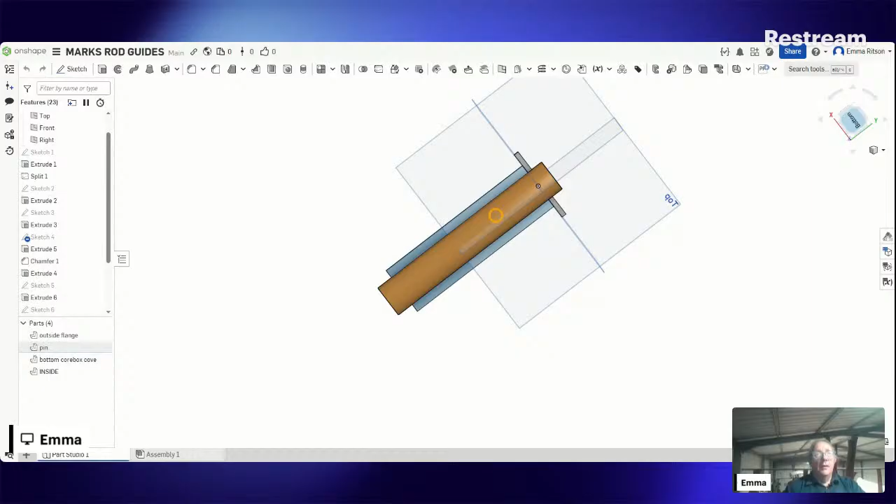Been messing with this week. There's always jobs to do.

Now these are steam engine parts, or not really steam engine parts, but they will be steam engine parts. This is what it does. Right, I'm going to take this out. I might take that one out. But we've got two steam engine guides here that need to be remanufactured because they're worn out. This is a rod guide for a slide valve on a Fowler steamroller.

It's in two pieces, this way and this way, so that you can take them out without removing the rod and the valve and half the running gear to replace a worn piece. So they can be replaced very quickly when the engine's running, and there's a bolt in each one. So you just slide down the rod and you do the bolt up.

However, these are quite worn. They are quite worn. And we're going to remanufacture them. So to do that, they need a bit of packing on them, really. See how worn they actually are, you can see that. There's a bit of wear in it, that little lip there. Probably on the full diameter, probably 1.5 millimeters up and down. Not so much side to side.

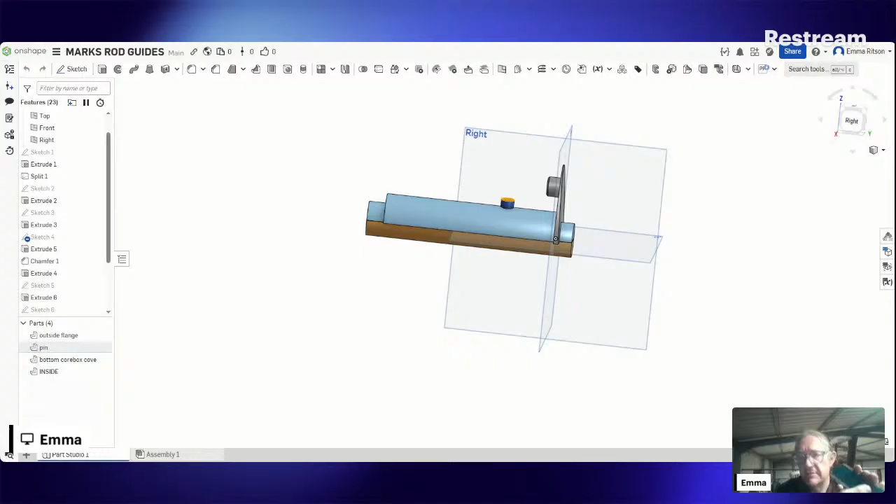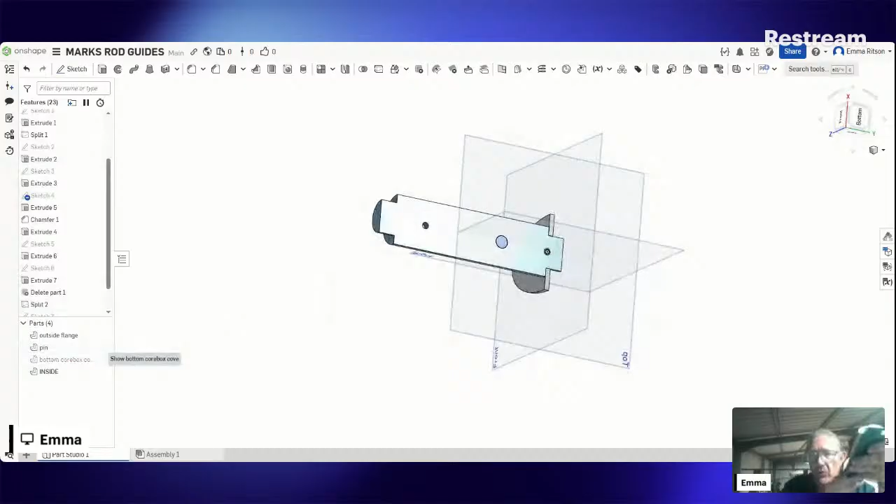If we look at this drawing, we've got 2 pins in the bottom surface to locate a second half of the core, because it's got a round core. And if we put that core box back in place, we'll make a core that diameter. When we mould this in the sand, we can drop that core in, and that'll give a nice hollow casting that should be really, really nice.

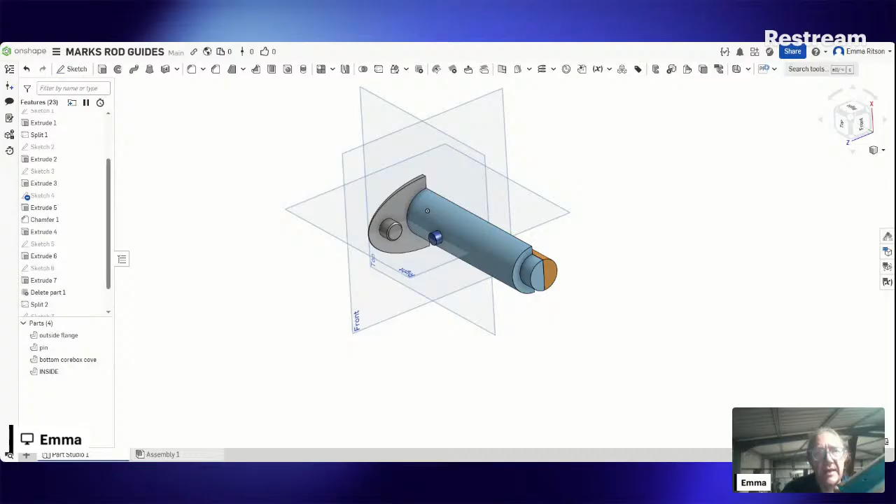So that's the plan there, and that's where we go on with that. That's what I've been messing around with. It will get touched up and a bit of filler and stuff in it, some glue, and that shouldn't be bad, and you should be able to fairly easily break all that out if you want the bits back. So that's one thing I've been working on.

And poke my eye out with a spoon again. It's not even a very good spoon. A cup of tea with the bag still in it, because if I put that out on the table, it'll make a mess. Could probably put in the teaspoon now, put the teaspoon on the table, but I'm not convinced that that's going to fix it.

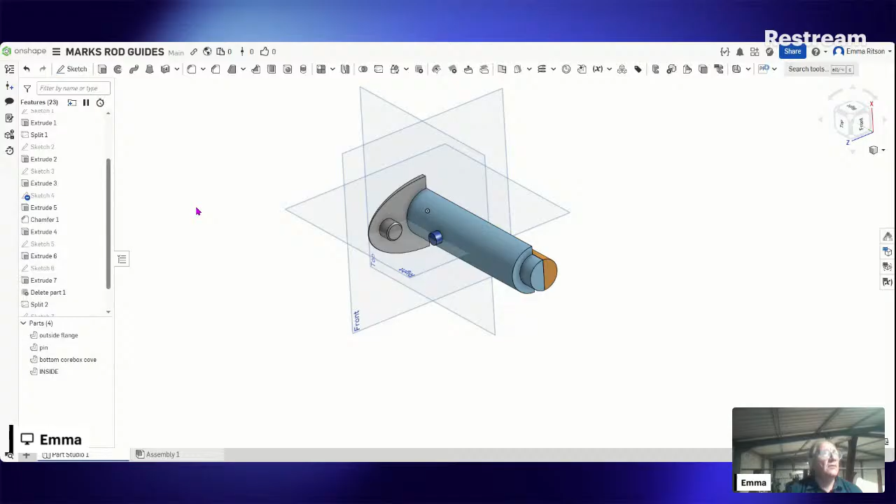So that's sort of what's happening. Oh, I've got, what else we're working on? I've got a picture.

How can I show you the pictures? Probably quite easily. Let's have a look here. I just share them online and then drag them off on my computer. Well, not online, but give us a minute.

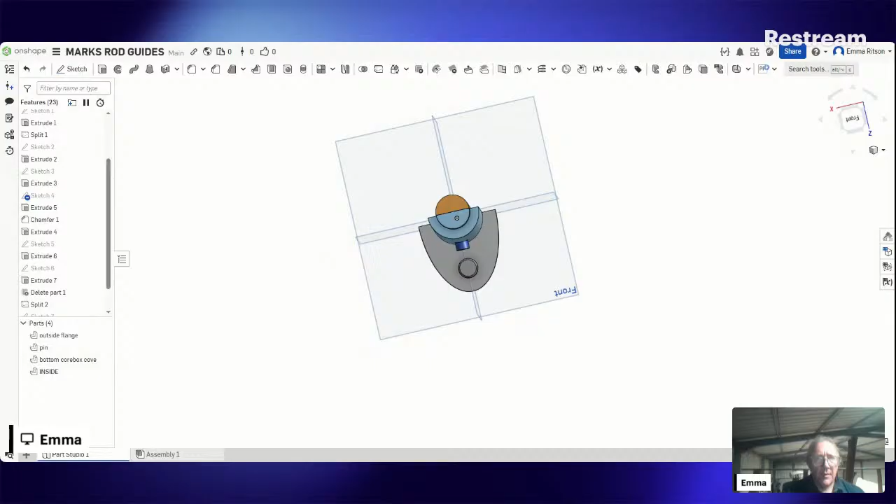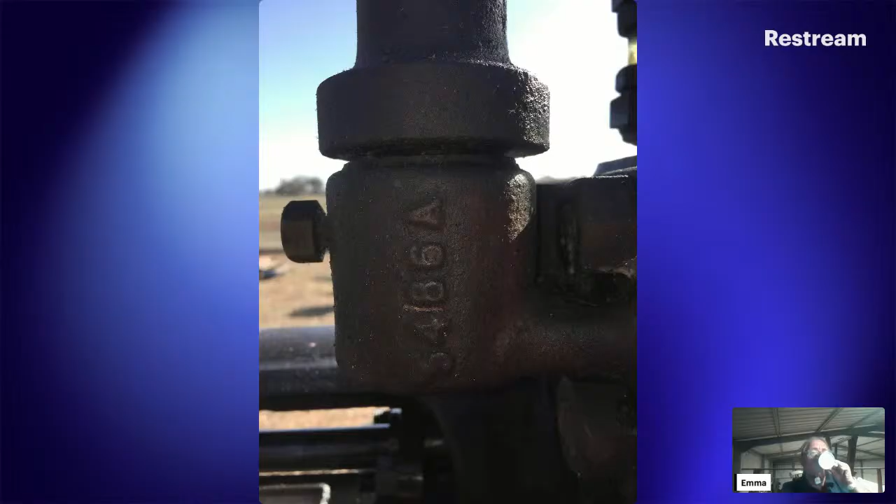Let's have a look. So we've got a picture here of this particular piece with the numbers on it. Now I have been messing around with that too. Have a look.

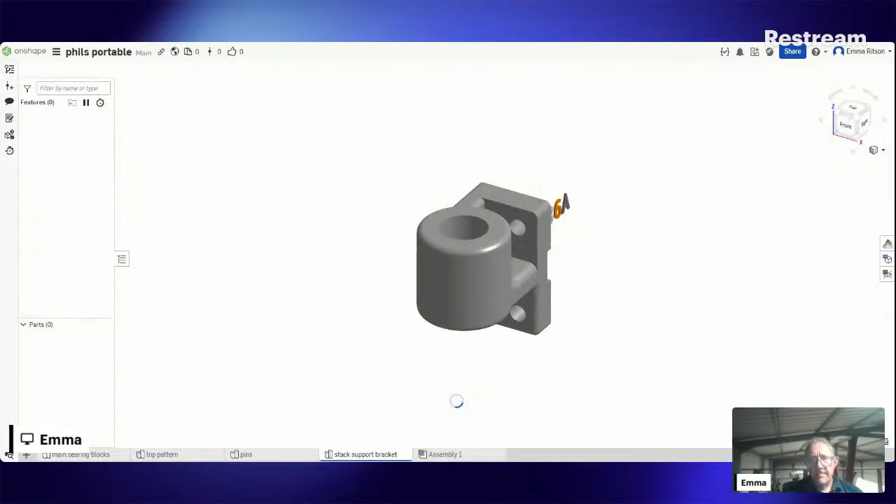Chat's open, but there's no one chatting. Everyone's a bit quiet. So we've got this thing here that I've been messing with.

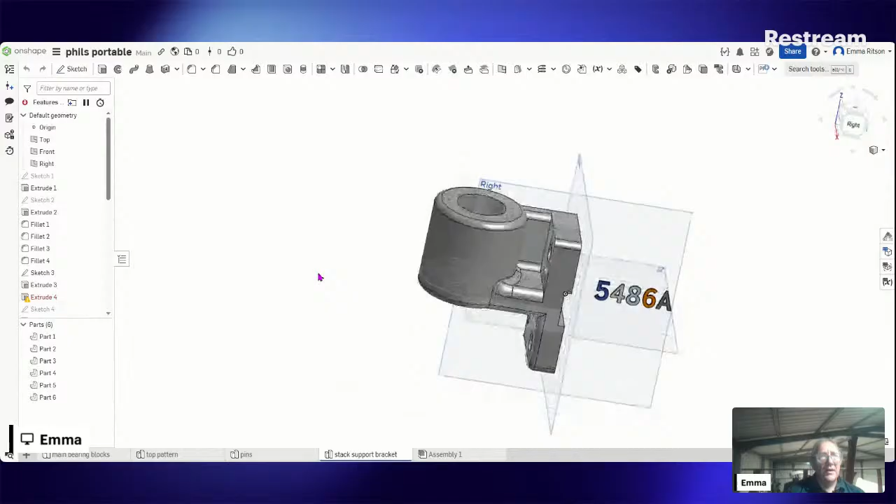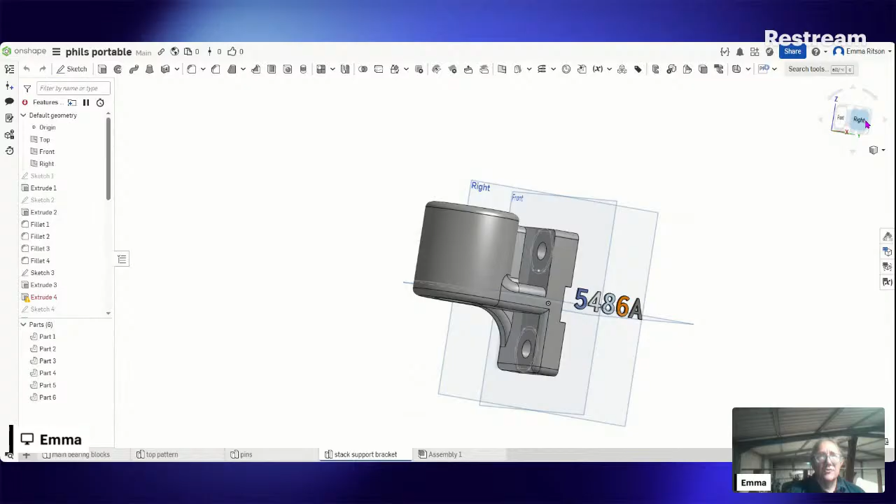Alright, this is as far as we got with it. It's got basically support for the chimney when it's laid down for transport on the smokestack, or whatever you want to call it, when it's laid down for transport on my mate Phil's little portable engine, a 2.5 horsepower Clayton Shuttleworth. It looks something like that, realistically.

If we look at the picture of the casting, it's got S486A written on it. Is that an S or a 5? Let's click this maximize button. That's all that does. Okay, it's probably a 5, 4, 8, 6, A, and those letters I've got there are probably quite good. If we select them...

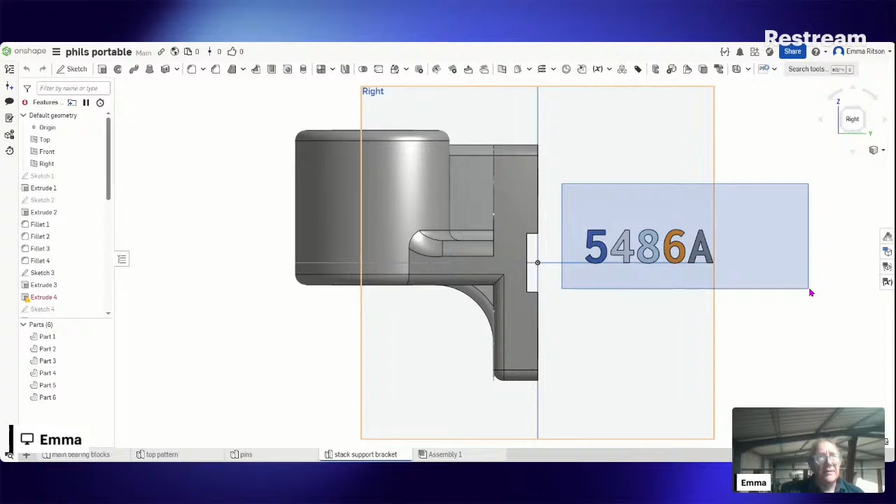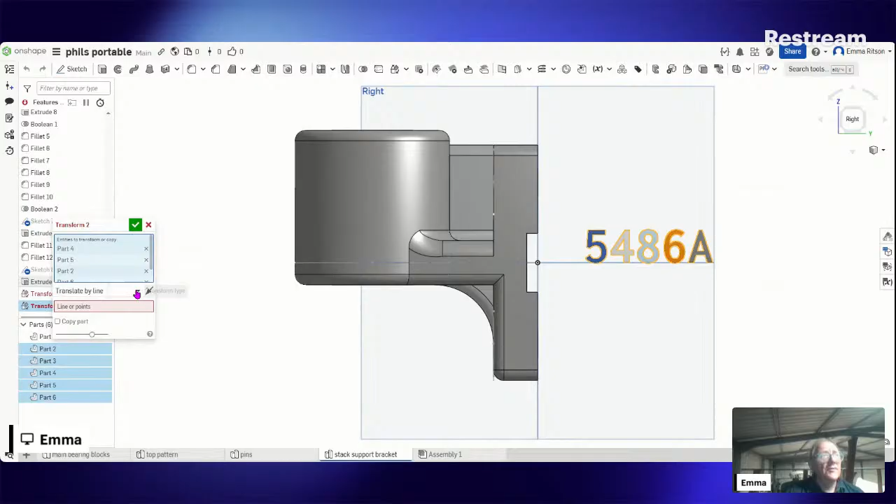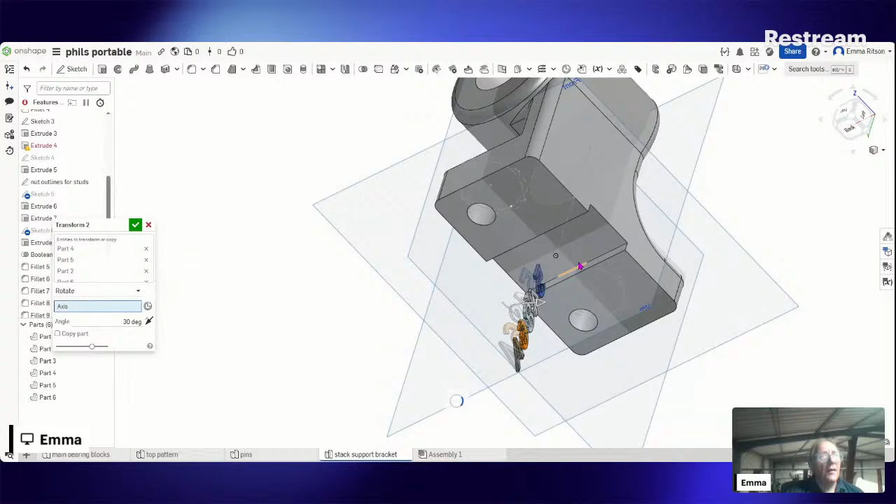Bit of actual CAD here - on the linear pattern, no, on this one, transform. And if we drop down this line here, we've got rotate. It's going to ask us for an axis. Not that one. I think we spun it around on that axis.

Might work. Hey, Mark. Sorry, this was a bit impromptu, we're a bit early and all that stuff.

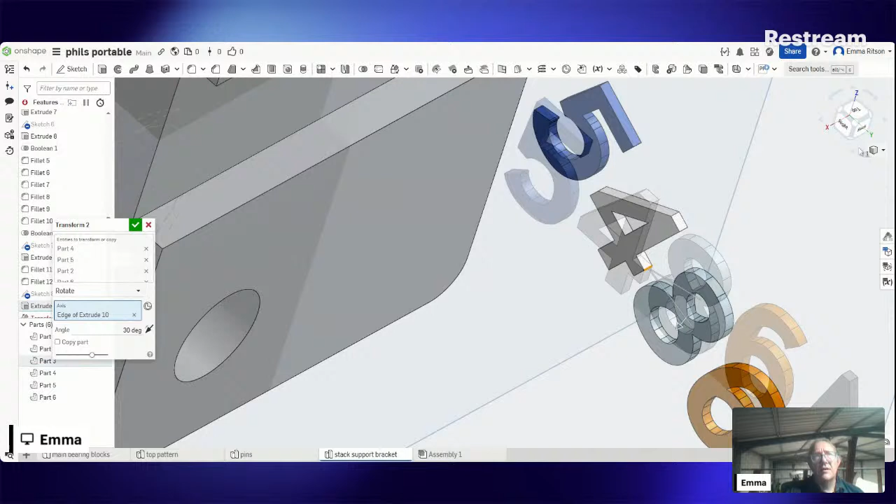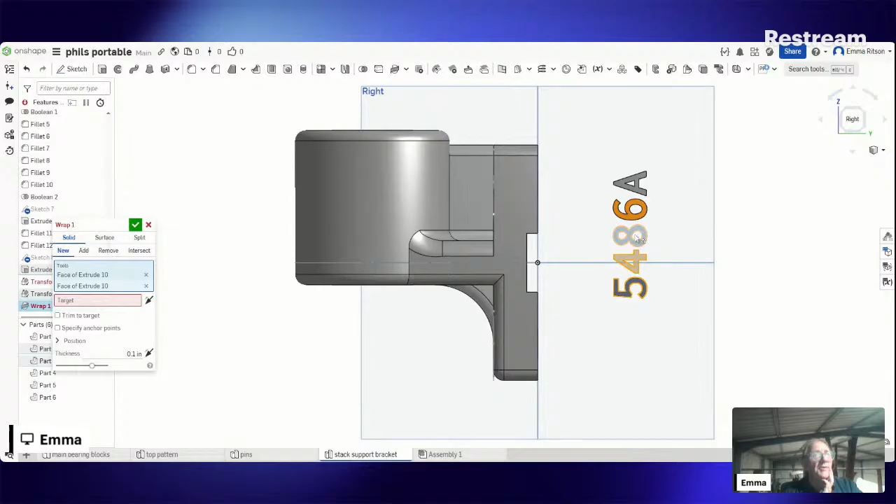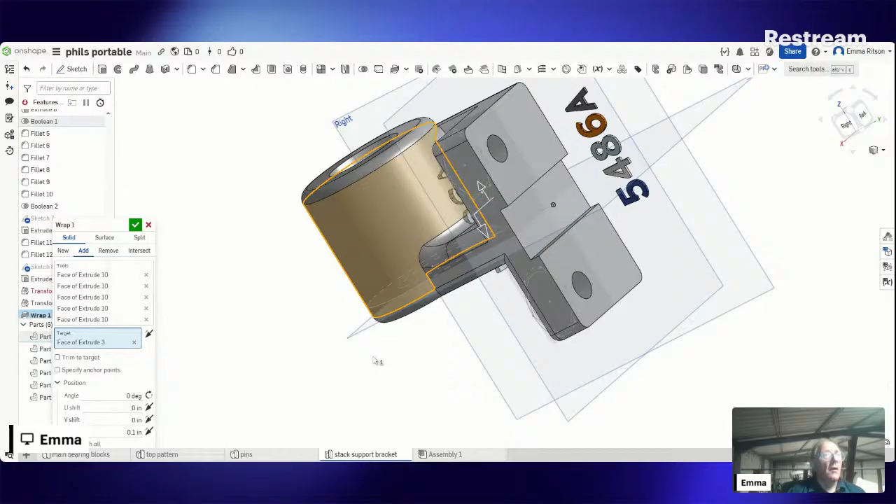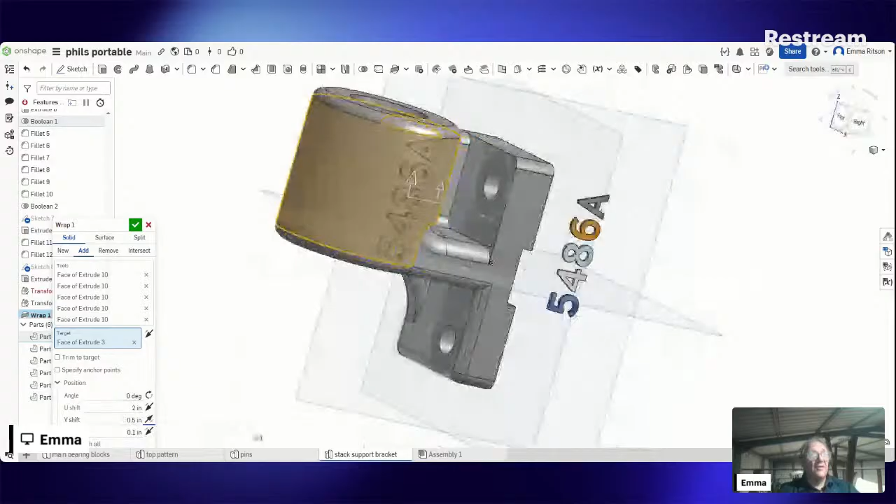Swung about 90 degrees - it's the wrong way up. If we go the opposite direction, that's the right way up. Now we need to put that across on there. I meant to have a look and do a bit of a tutorial for myself on this, but I think I've got it. What it's done is put it around there. So we need to - let's see if this works - 90 degrees. It doesn't. There we go. And let's put that on there fairly nicely. Probably a fraction big.

Going to have a look at this picture again, which is a bit muddy - this mouse. I don't think it's quite that big. Just looking at that, I think it wants to be a little bit smaller than that. But as far as position goes and all that sort of stuff, it's probably pretty good. Now, what we need to do is edit this sketch. That should change everything.

Let's see what that does. It's getting very close. Maybe it sticks out just a little bit too much - that's using the wrap function. That's quite good. Does it stick out too far there? Probably does. Let's edit that. .075, 75 thou stick out. Let's see how that looks. Might cast a little bit better. Anyway, that looks pretty good. Bit of a clean up and some filler, that'll look pretty good.

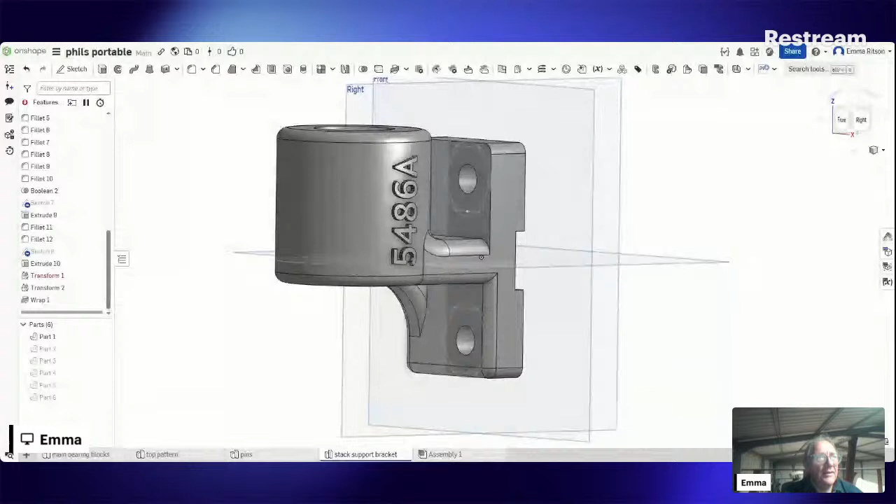I'm going to turn these actual existing parts off. Anyway, that's a good start. A good coat of high build, like surface filler, spray filler on that, and it'll all round up nice and cast really nicely. So you can't see that because I haven't gone back to the screen, which is a bit poor. Let's click this again. Anyway, that's what we ended up with. We made it a bit smaller - we just changed the sketch diameter dimension, and that brought it back down to where it needed to be, and not quite as thick. But that's another job we've done tonight.

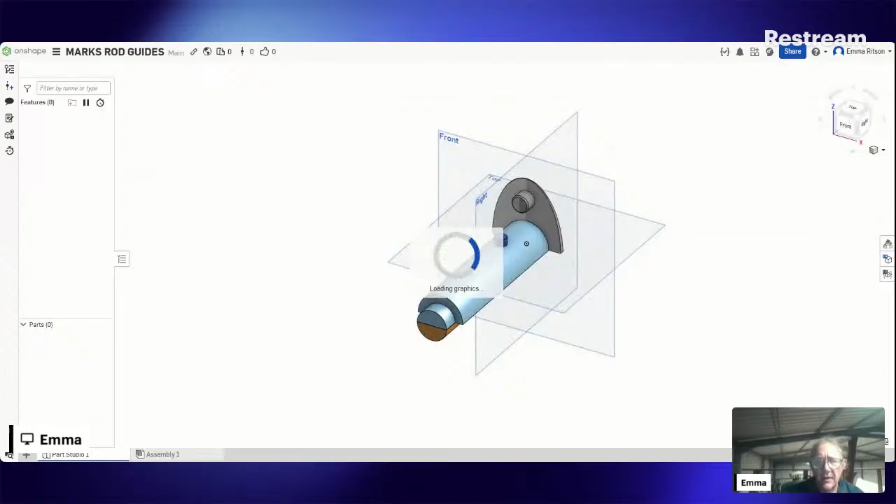Now Mark's here, we might have another look back at what we were looking at before when we started. Looks like it's only Mark here - if Mark's still here, maybe Mark's disappeared.

Sorry TMB, I'm sorry about that, I did get your message too. It's been a crazy full-on week. While I'm thinking of it and while I'm sitting here, I will text you the original for that drawing. I'll have a look at that. Thank you. My life's been a bit crazy this week, but anyway, thanks so much for your patience with that. It's a bit crazy - Mark's disappeared.

Going to show him this. We've already had a look at this, but - oh, he's present, Mark's present.

Anyway, this is the filler piece that I printed for the rod guide.

Awesome, that's great TMB, that's really good. That's what we're about.

This is the filler piece that we printed in the rod guide. It still needs a piece for the core box on the back half there. If we make that in 2 halves, we can mould that down in the sand and tamp around the top, then turn it over and put the other half on and put the cope on. I'll put the drag on and lift the 2 parts apart, take this apart and put a core in it, and we've got a really nice casting. You can imagine it with a core that diameter. So in there, we've got the back piece on, we've got the core in - working on that as we speak.

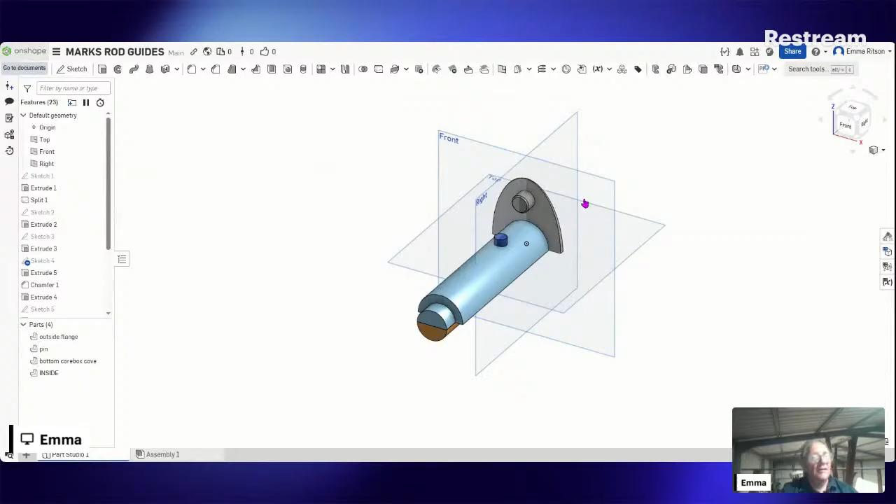Now Phil sent a lot of mud maps, and we might have a bit of a play with them because Phil needs some laser cutting or profile cutting done. And I need, for his portable, some things done as well, I think. I need to spend some time on those. There's always 1,000 jobs.

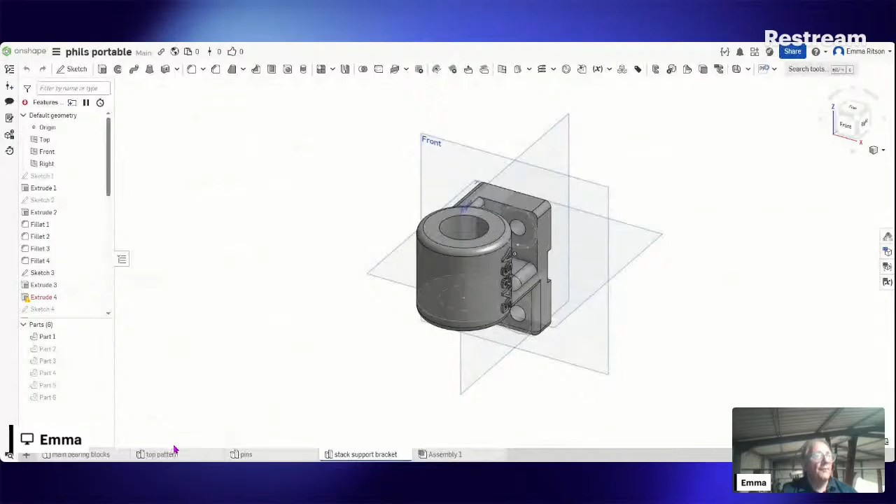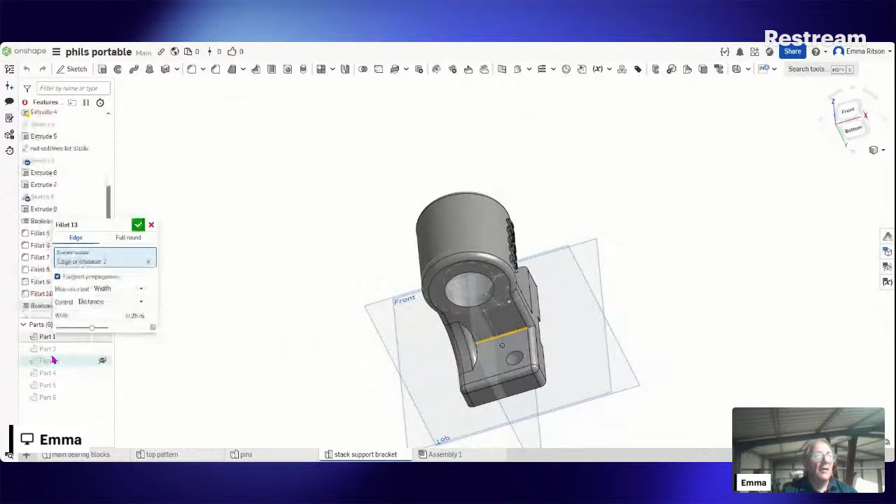Now this isn't anywhere near finished, it needs a little bit of work - clean up stuff like that just to make it sweet. There's no fillet in there, and it won't fillet there because of reasons. We will make it work, but I'll spend some time to sit down with that the minute I've got a chance, really.

He sent some other pictures too, so we'll have a look at them. Excuse the blue screen - it's not what we want.

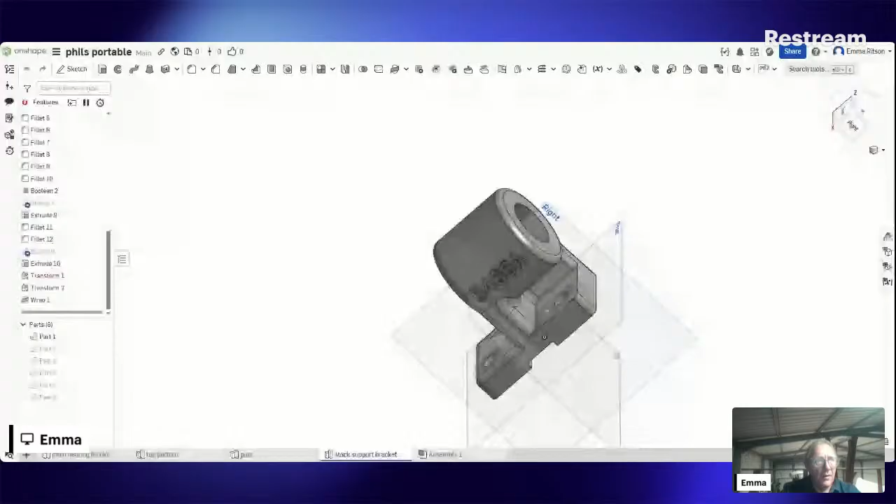That's a fairly straightforward thing to do. Let's do that. So we'll go back to... stupid mouse. Go back to here, and down here on the plus, insert new tab. We'll click that and then create Part Studio.

This is Part Studio 1. We'll rename that so we can find it again next time when we're talking to him. And we'll call that eyebolt for a start. We look at the top.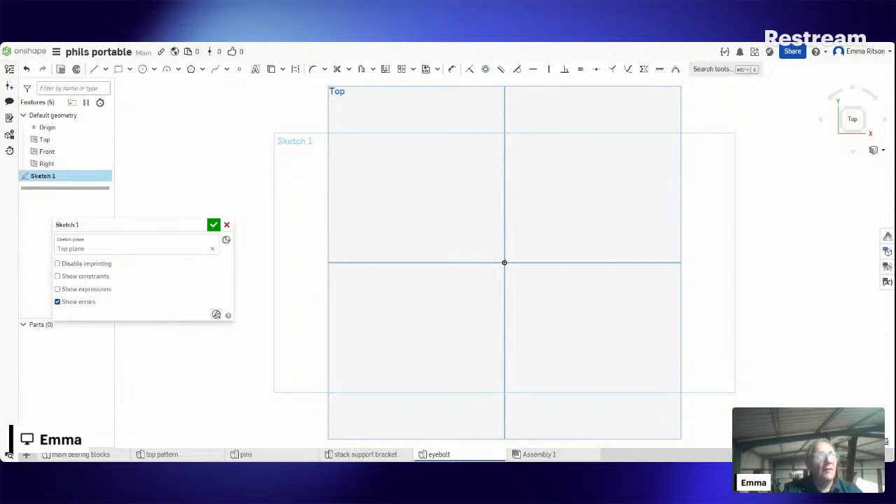Sketch on here. It should be a fairly straightforward part to make. Click sketch. We can click on top, or we can tip on top here. Click on top there. Does the same thing. That says top plane.

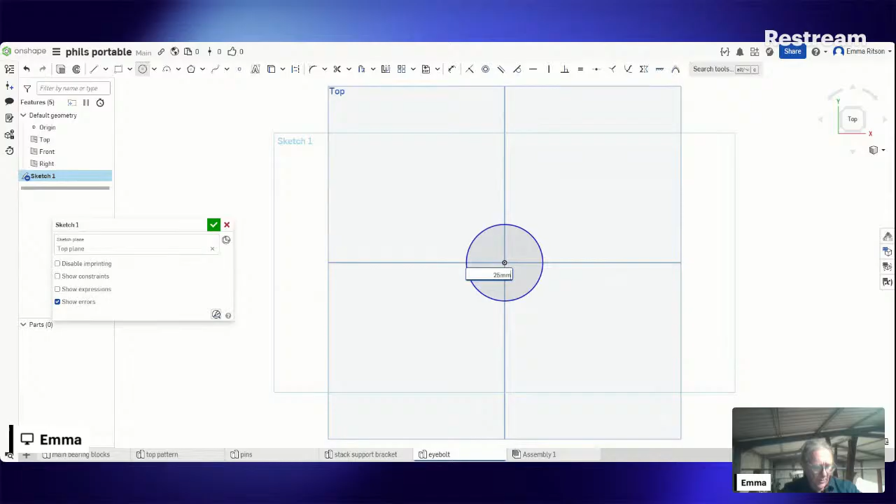Now, first one we know about is this here, and it's in imperial, of course, whereas his is metric. We can just put 25. It does the same thing, 0.984 of an inch.

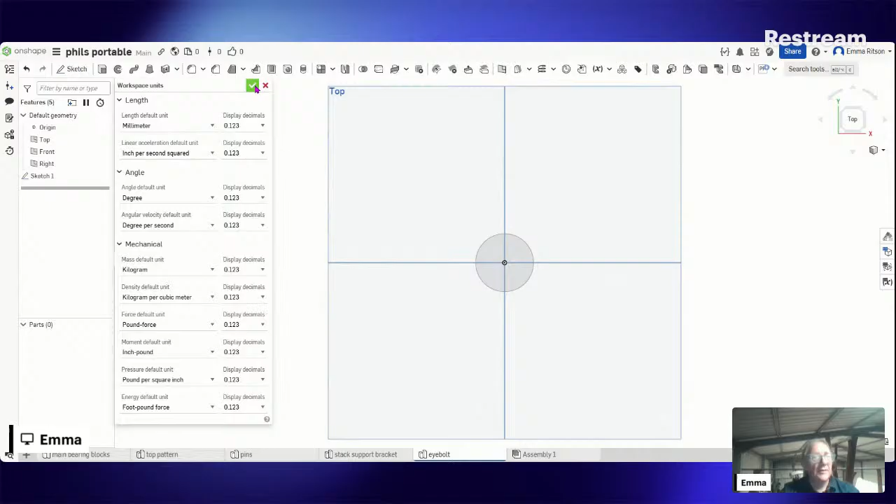While we're there, we can go up here to this one, and where it says update workspace units, we click that box, we can change this inches to millimeters. And click the green box, and it regenerates that.

So if we go back to this sketch, edit it, see, 25 millimeter. So that works. That's as easy as that. You can change backwards and forwards as many times as you like. If you're sending this to a third party commercial laser cutter, though, you want to change it to millimeters. Otherwise, they'll try and cut it 0.9 of a millimeter.

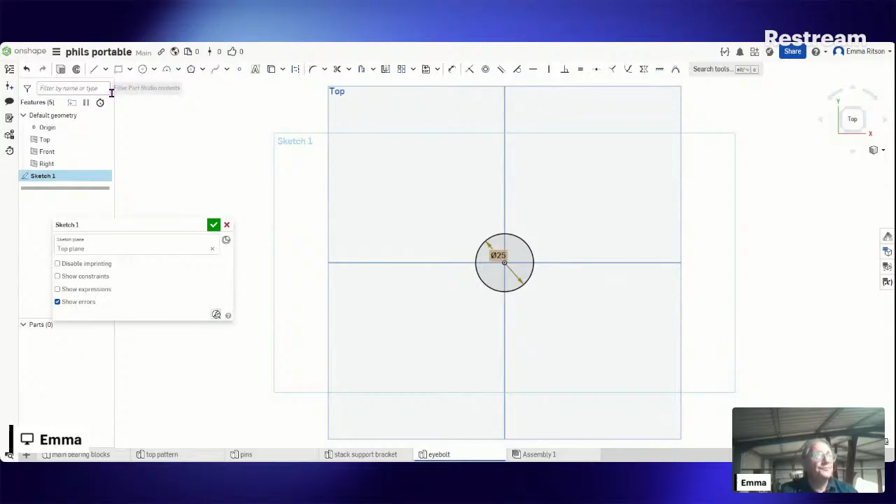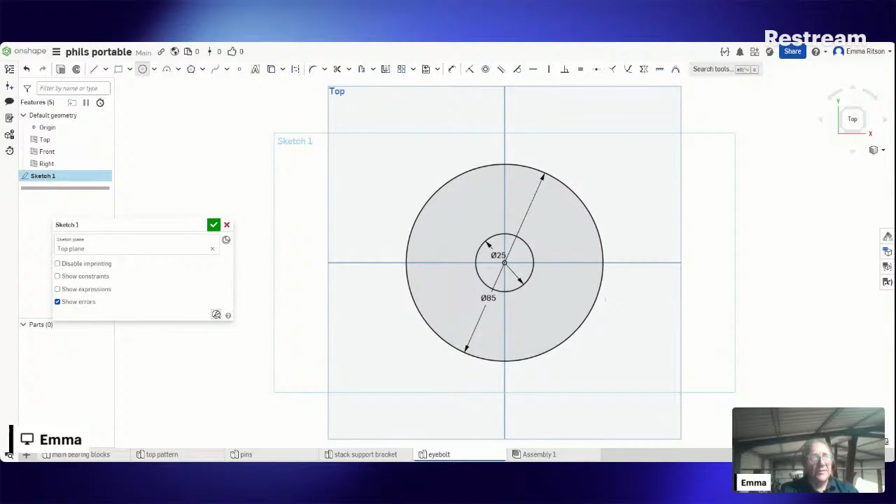So the other outside diameter was 85 mil. So 85. It's still not anything like his actual drawing. Let's have a bit more of a look at his drawing. Definitely says 85 and 25 mil.

That means that this is 30 millimeters there and it's 70 millimeters long from there to there. It's not a helpful sort of a measurement, but let's go with that.

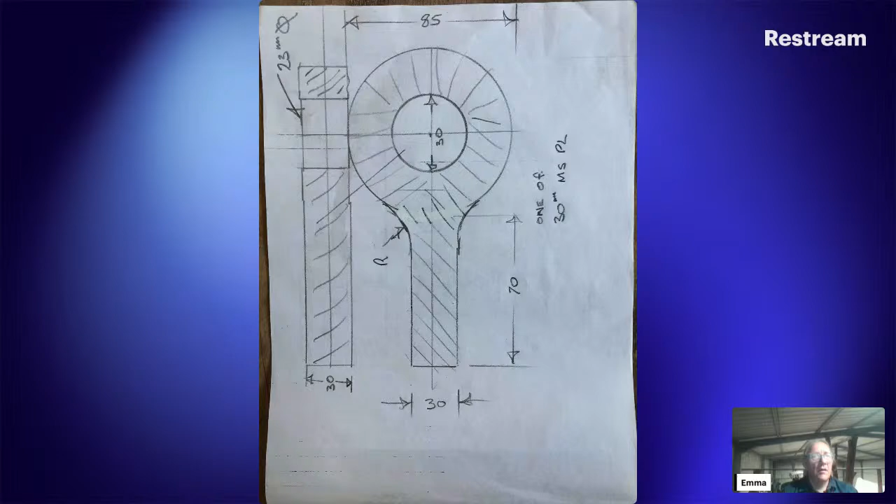We'll go back to here. Now, this measurement here should be 30 millimeters. There's a couple of ways we can check that. We could put a dimension on it.

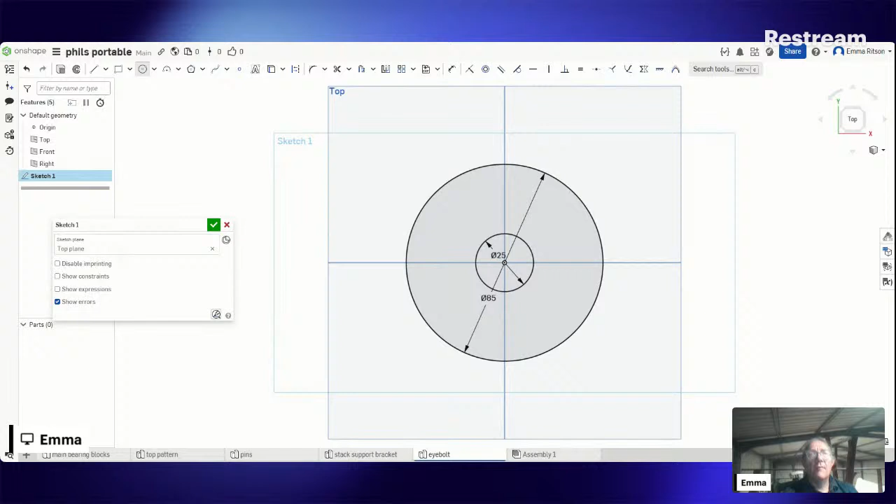Down here behind my photo, it's also behind my head. It's not helpful at all. I'm going to have to put the camera down to see that. There's a little measuring tape and it says show measuring details.

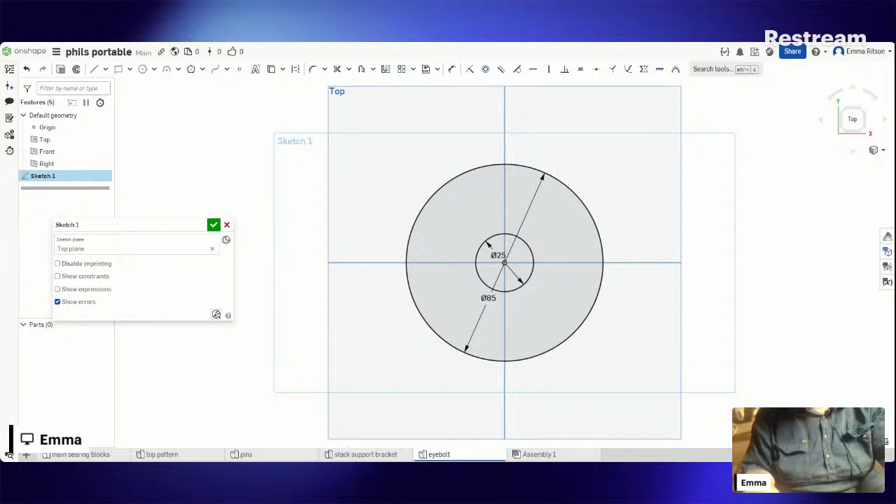If we select entities to measure, from there... see how organised I am? You should take note of this because I'm not. I'll open that again there. Select entities to measure.

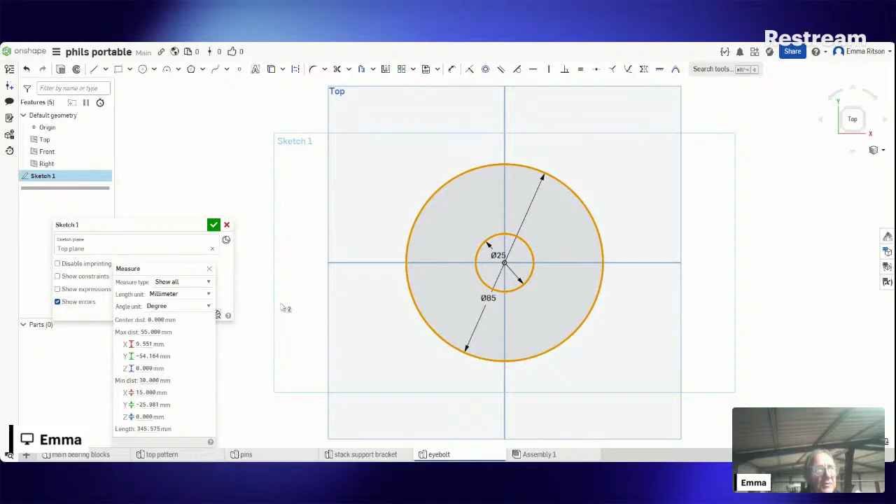Minimum distance is 30 millimeters, so that's 30 millimeters between there and there. That's great. Now, click that and we press Q,

or this box as well, which is the construction lines. And from there, we'll make a line down. No matter how long, but if we type in 70 mil like it says,

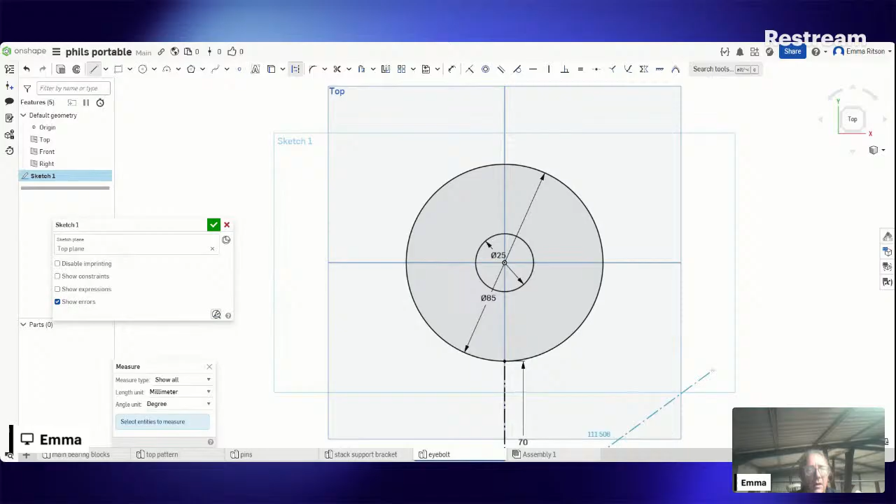and we can click on this top here. Actually zooms it all in. I guess the quickest way to do this is probably like this. We start here on this dot and we'll click straight on there. Come across.

Says we're still connected. There we go, we're back.

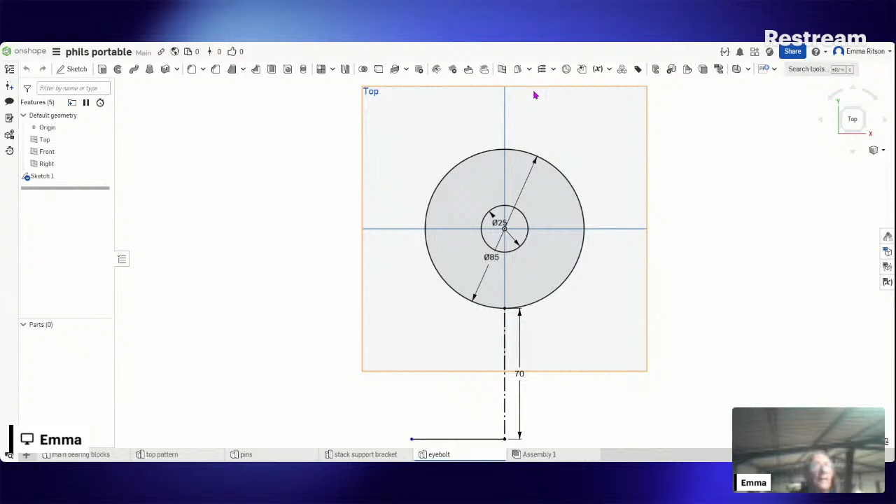This measurement here is supposed to be 15. How did we get 49? 15 millimeters. Press enter. There we go. And another one up to here. From here.

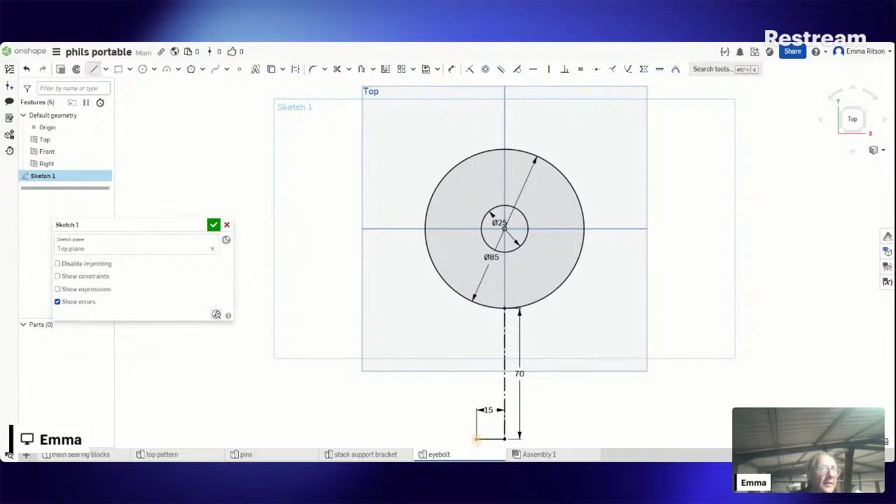And a little horizontal, vertical line appears there, which is a restraint, I guess you'd call it. We call it a restraint. But what it's telling you is parallel to the dotted line, or parallel to a particular line that's usually halfway between the line and the line you're putting in. So it's restrained as parallel.

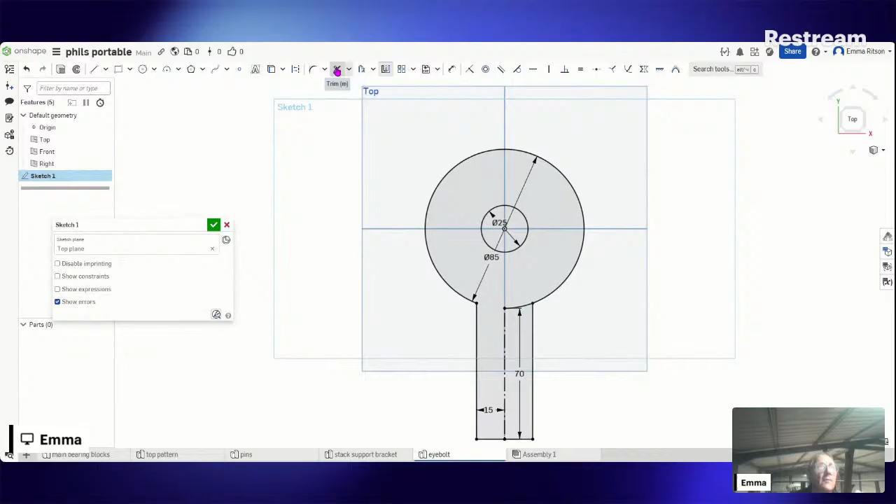If you trim that, and trim that, we use the mirror function. We select this line as a mirror, then this one and this one. There we go. We use the scissors. And that gives us our basic outline.

Only one job left to do, or two jobs really, but we'll do this first. Use this one, which is a sketch fillet. Select both of them, click on the sides. And that gives us a 30 mil fillet. So there we go.

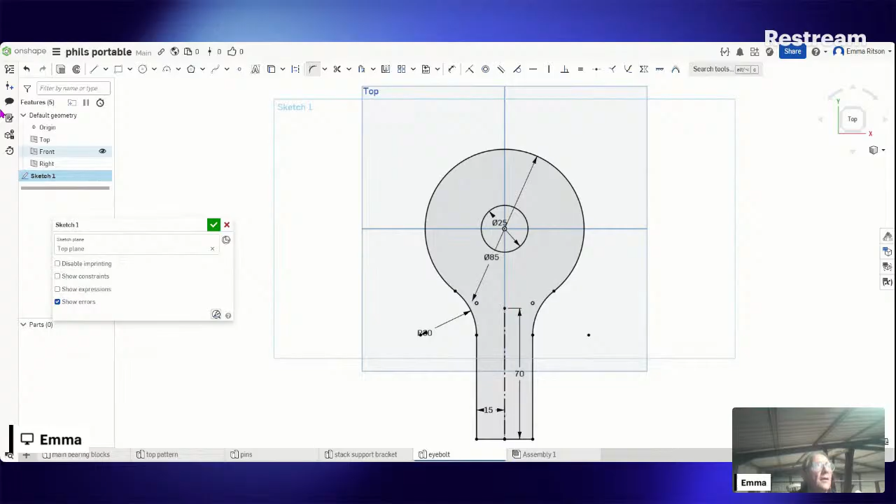If we click the extrude button, extrude at 30 mil. Basic bits, but there we go.

That's one done. Let's have a look at the next bit.

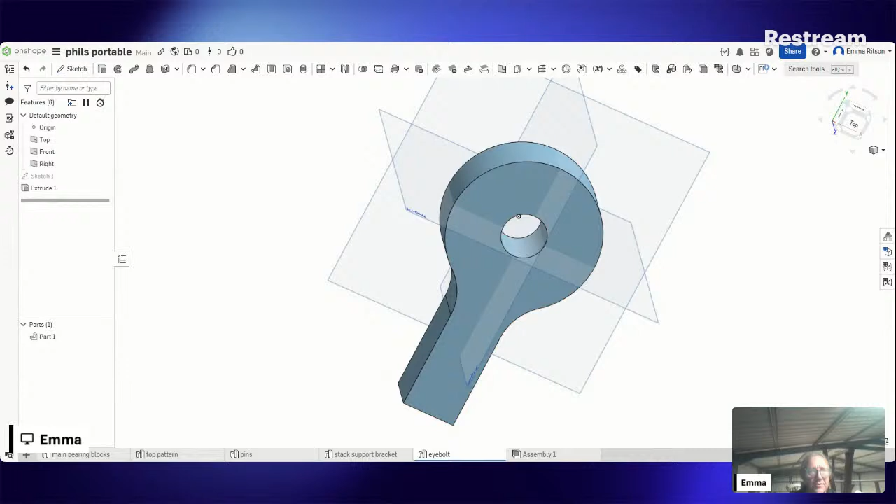Still getting used to this mouse on the screen the opposite way around. I can move the laptop across here, have the screen up there and connect it back the other way, the same as it always did. But we're living with this. It doesn't work particularly well because the screen's in the way, my laptop screen. Going to need a little bit of attention, this office setup.

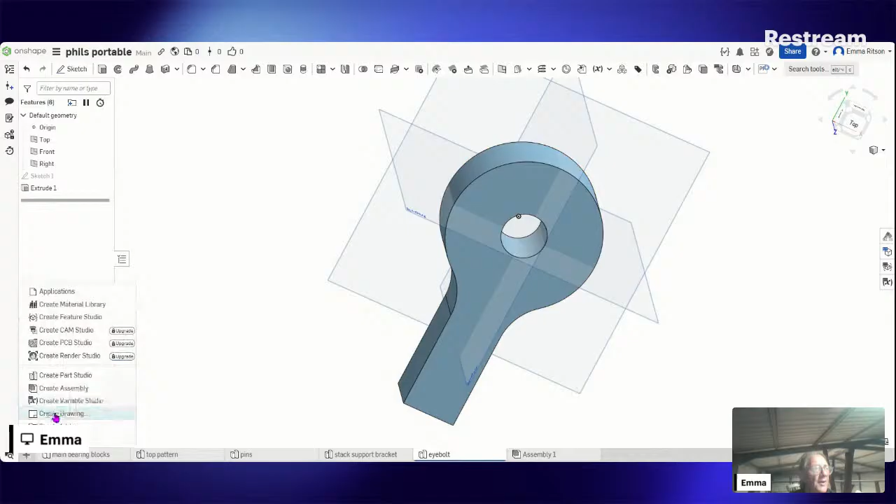No, new part. While that's loading, let's have a look at the next sketch. There we go. Blue screen again. Don't know what happened there.

Big day at work. This bit looks a bit more interesting. Here we go.

So, smokestack stay. Says it's a 40mm plate. Oh gosh, that's a fairly serious bit of stuff. That must be what he's going to bend up. It's a 40mm plate, that's kind of crazy. 280 and 40mm plate, that's a serious bit of stuff.

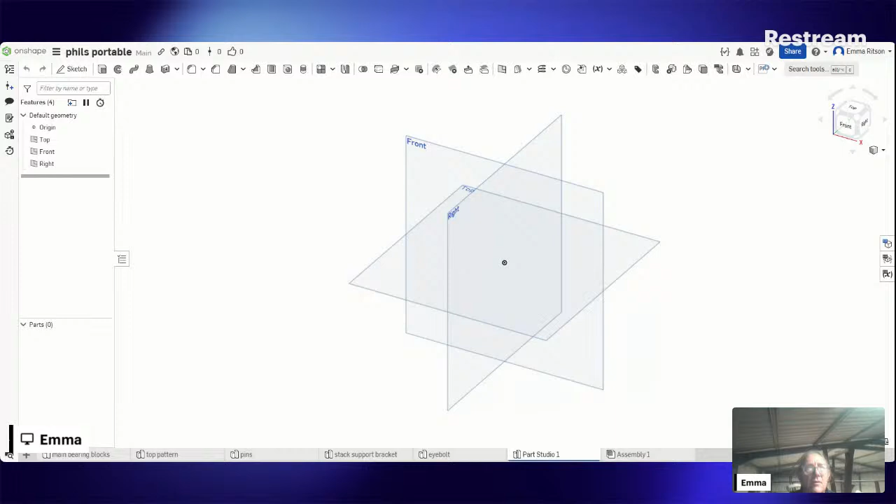Anyway, let's have a look at that. So we've got a new sketch on a new part studio, so it's sketch on the front plane. Click on that, it's the easiest. Now this looks like a mirror image piece.

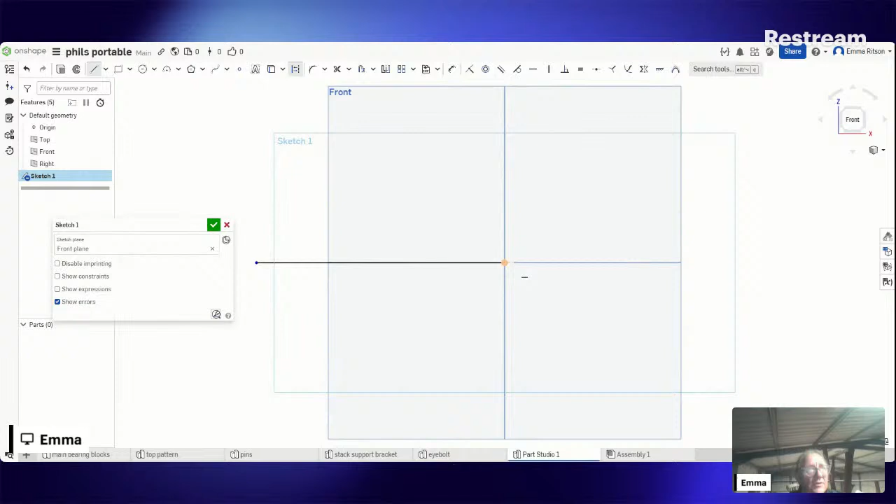So if we draw this here, right, whatever it ends up, and we click line and we press Q for construction line, we start here and we go down here like this with the construction line.

Right, then there's this trick. We can make this diameter measurement, so we don't have to halve all the dimensions. If we click this and click this and this, nope. We click this and this.

Oh, that's a bit poor, isn't it? I haven't used this program for too long.

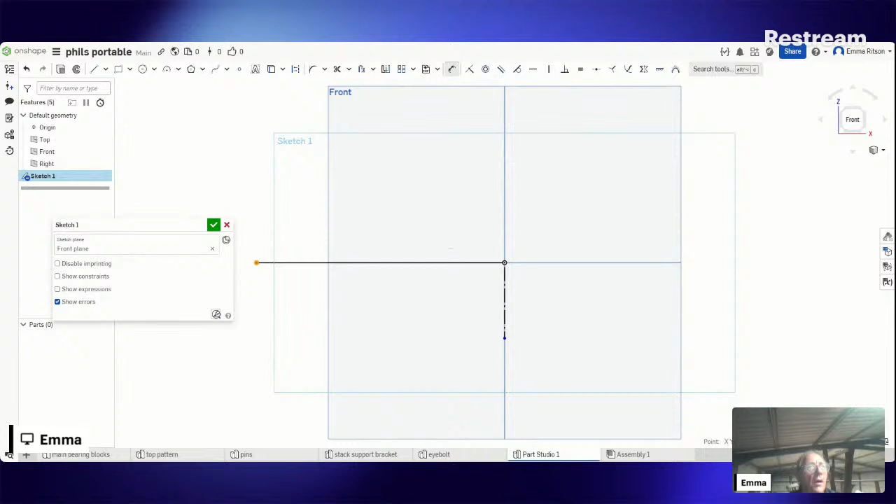There we go. So that gives us a 280. Well, it says diameter, but we know what it means.

Let's see if we can do that again. This one down here is 15 millimeters. Except it's not. Missed out the one. There we go.

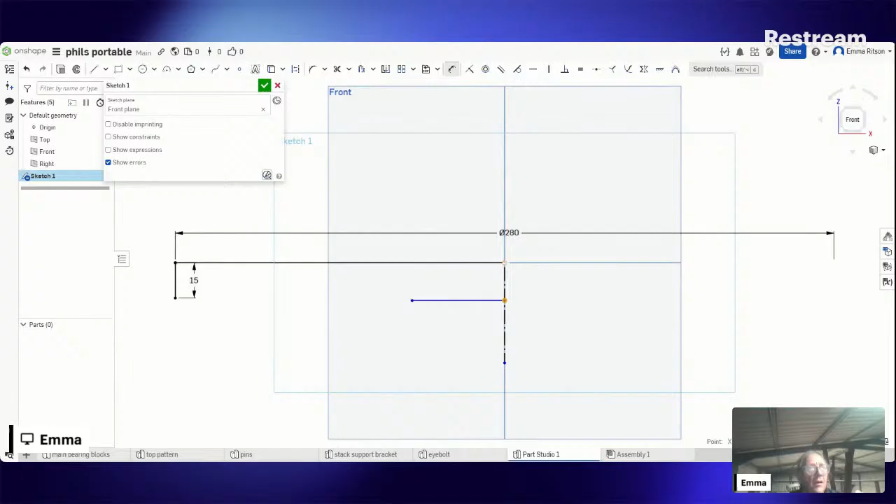Now down here there's a line. It doesn't specify how long the line is. But we do know that that line is between there and there. It's 25 mil.

Let's put the rest on anyway. We'll come back to this. We'll put the same measurement on there. We should be able to make this measurement from here to here.

That's what I said, 40, didn't it? Is that right? And this one across here was 42. Right.

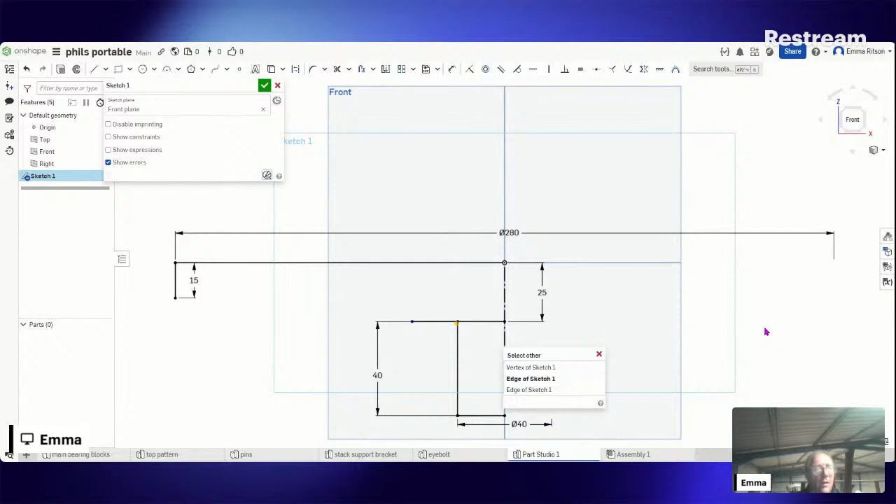There's a sketch up here. This will all come together. Does that look anything like half that piece? And can have another look back at the other sketch.

Definitely says 40 millimeters by 40 millimeters. And it says there's an 8 millimeter cutout radius in the corner. It's got to be 4 millimeters down from there. That should be doable. Righto, let's go back.

Probably the easiest way we can do that is here. If we make this 36, is that right? No, it doesn't work like that.

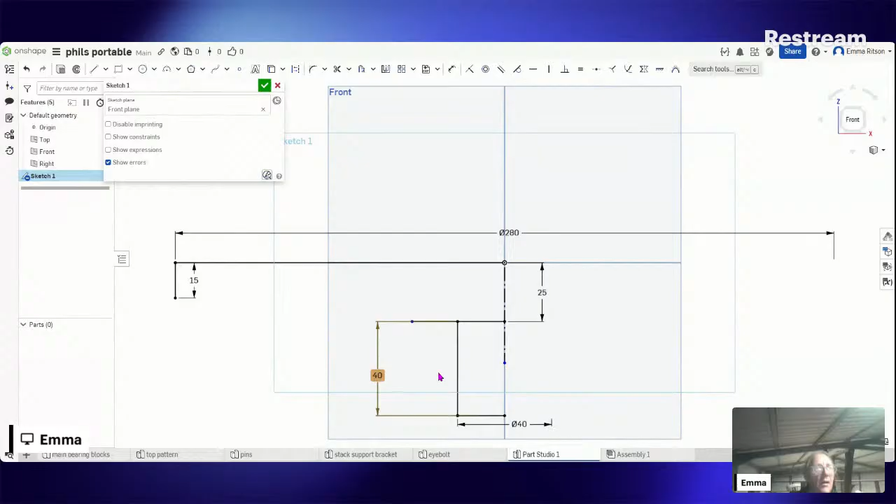What we need is another construction line, I think. Make that parallel, it's perpendicular to the orange line. You see the little constraint there?

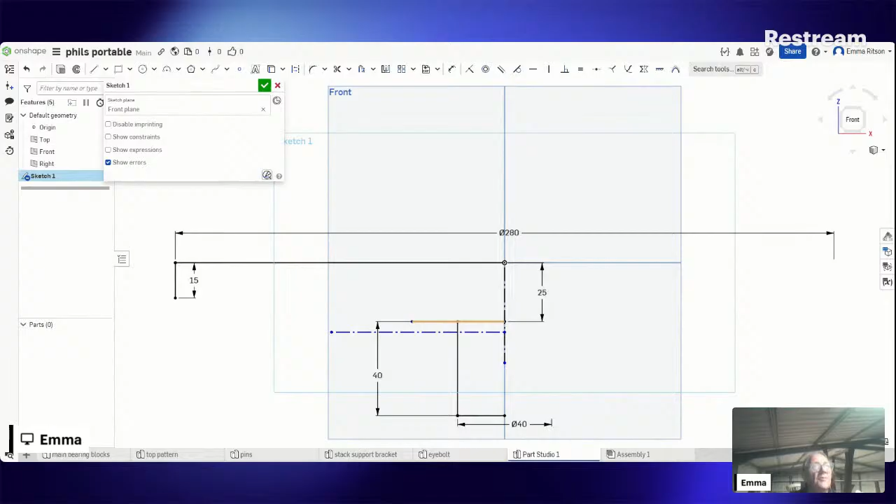Let's press escape and we'll put a measurement in here between this one and this one. This is 4.5, but because it's an 8 mil radius, it needs to be 4 millimeters. There we go.

And we can put a center point arc on that point, up to that point. And that says a 4mm radius.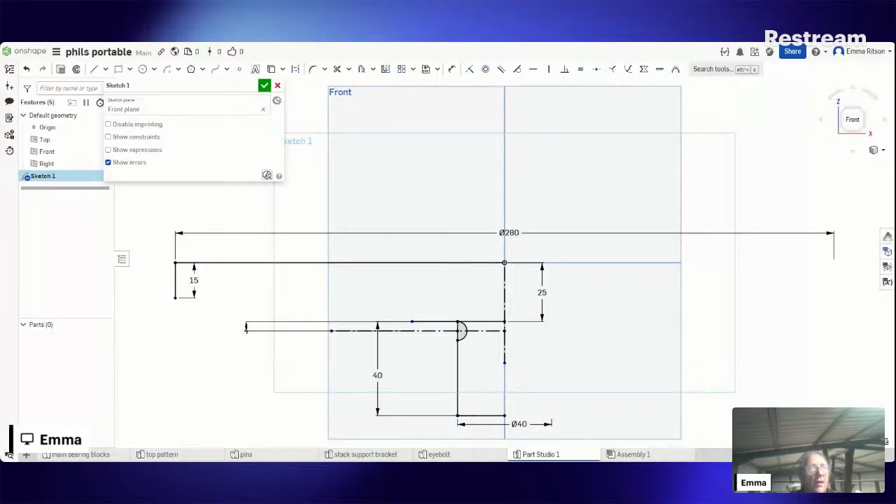Let's have another look at the drawing. It definitely says 8mm radius, so that's not quite right, is it? All we got to do is change that, I think. We change that to 8. There we go, that gives us that.

Now I'm going to guess, right here, I'm going to guess this line here, and guess it at 40, which is double at 80mm long, which is about double that distance there. And all we've got to do then is put a line in here like this to that point.

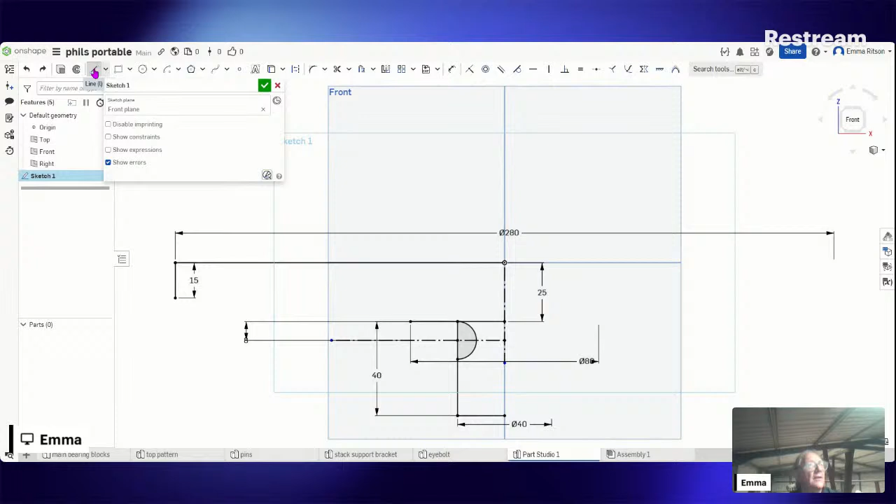Wrong. Control Z to get rid of that. Click line again. And of course that point's got to go to there.

So that's half. If we trim this here, wrong one. Dyslexia for you. We trim it with this one here.

We could click the M key. That's right, the M key. Toggle that on and off. Trim that one, trim that one, trim that one. And all we need to do then is use the mirror tool on this diagram.

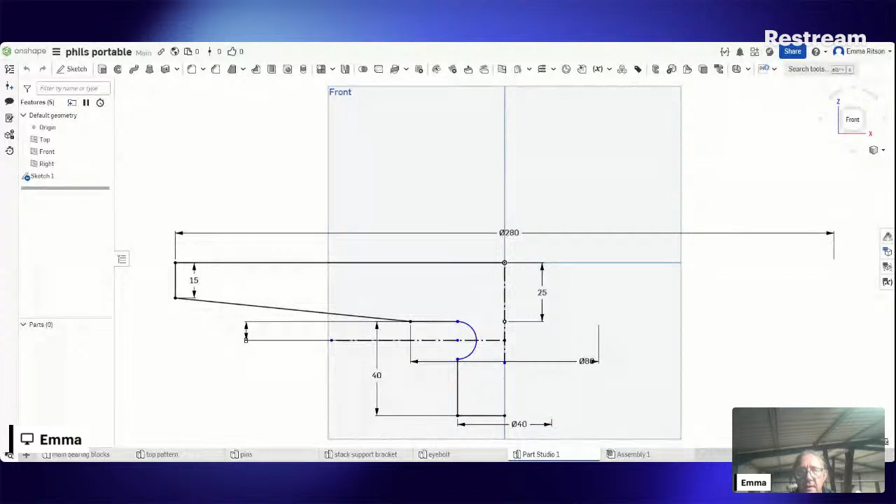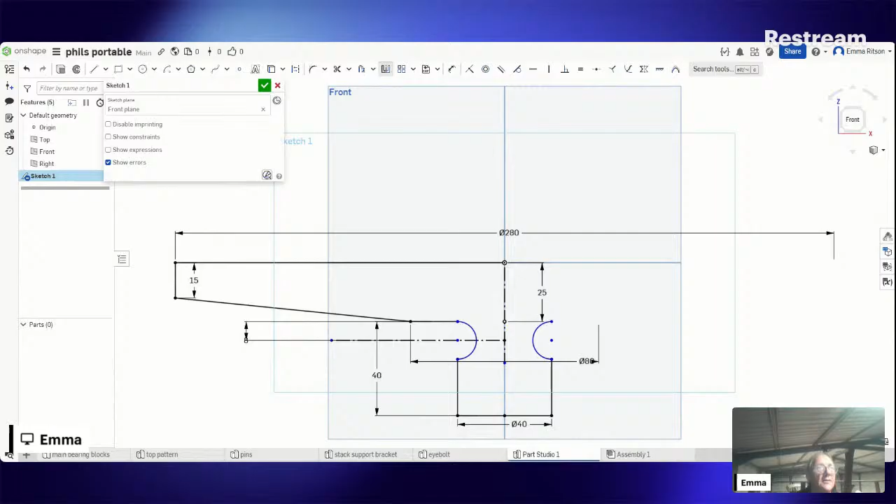So anyway, we're going to mirror this line here, and this one, this one, this one, this one, and this one, and this one. There we go. So that looks like the part.

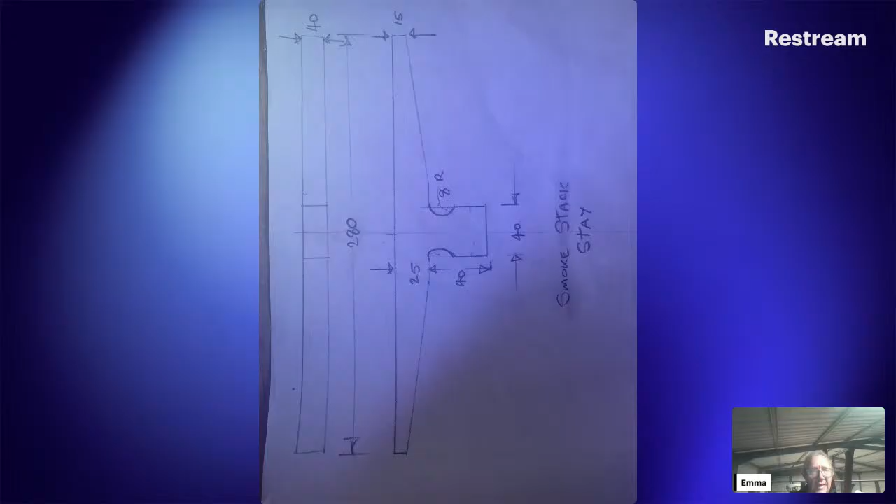Something like that. Now, how thick did he say? I think it was pretty thick. What's the drawing say here? The sketch. It does say 40mm thick. That's pretty serious, it's a big lump of plate. Anyway, that's not going to be cheap.

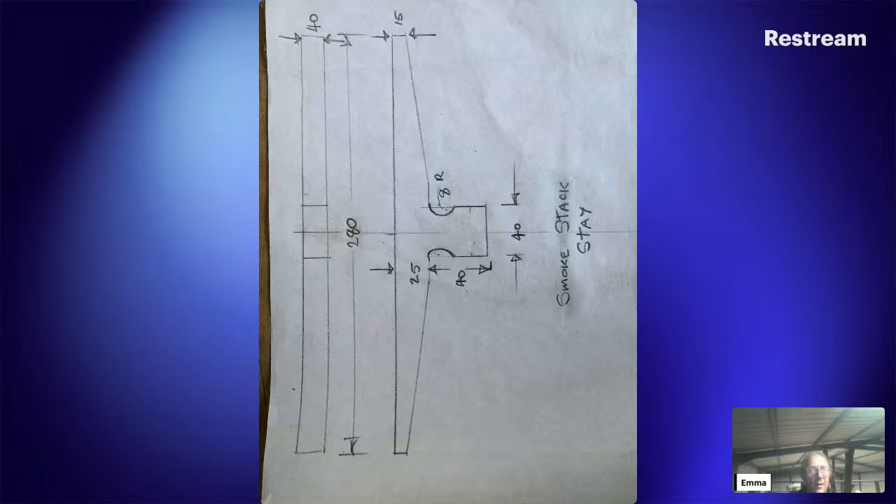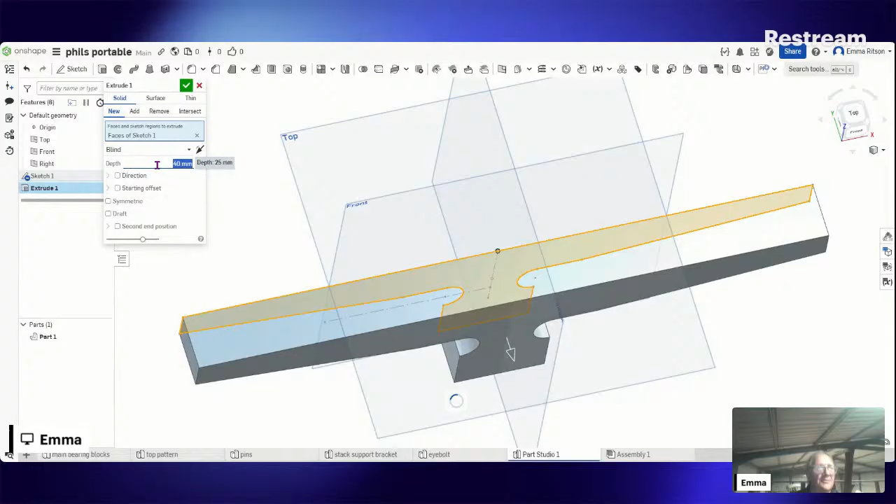If we click up here on extrude, we want to extrude sketch 1. And we want it 40mm. That seems pretty substantial, because if it's what I think it is, he's going to be going to roll that round.

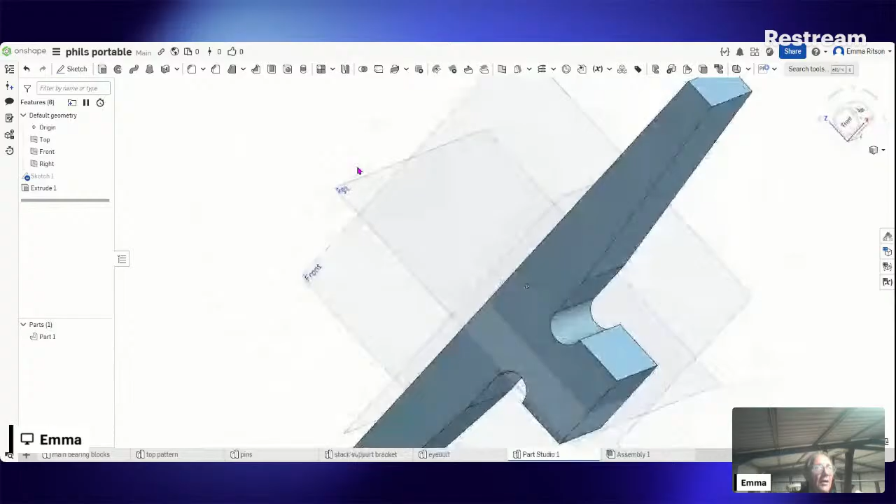Anyway, so that's that bit. There's more, but I probably won't keep going. Everyone's a bit quiet tonight. But anyway, there's a few more bits like that. None of them are any more complicated than that. I'll draw them up pretty quick.

Get them back on my phone and text them to him, or I can log straight into Onshape on my phone and download the screenshots. It's probably as easy as anything. And then...

See what he says. But I believe that he's going to roll this around the same diameter as a chimney and stretch it out and make a chimney support that goes on top of that little bracket we were looking at with the number on it. So he's a blacksmith, that's his qualification. I don't think he'll have any problems with it. I personally wouldn't even attempt it, but I think he's got it, probably.